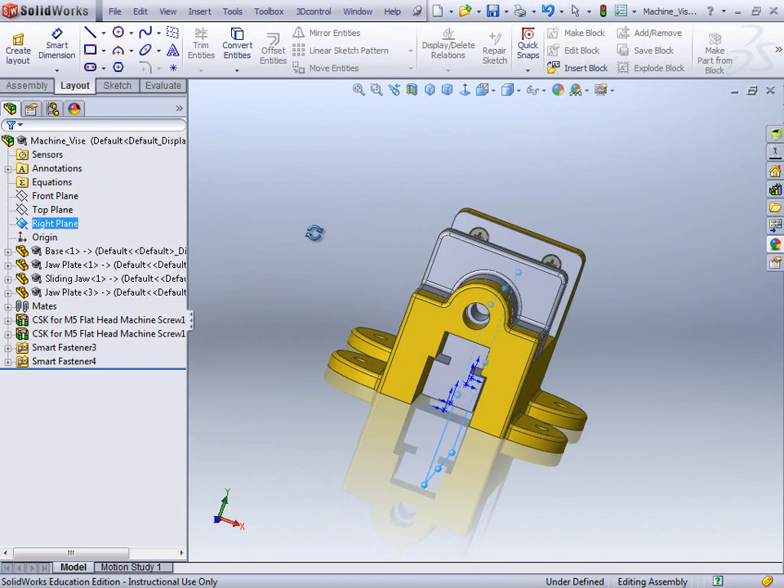Okay, so with this final part, we're going to create a new part on a work plane. So if I just quickly look at the work planes, the right plane there you can see is running right down the middle. So we're going to create a shaft that runs just up in there, and we're going to use the right plane as the plane on which to create it.

So if I can pop there and spin this around and go normal to on that, and if I select my right plane, and I'll go back to my assembly and create a new part using the right plane. Again, select my default template, and we're going to call this one Vise Screw. So Vise Screw, we're going to call this one, and I just save it into the same folder again.

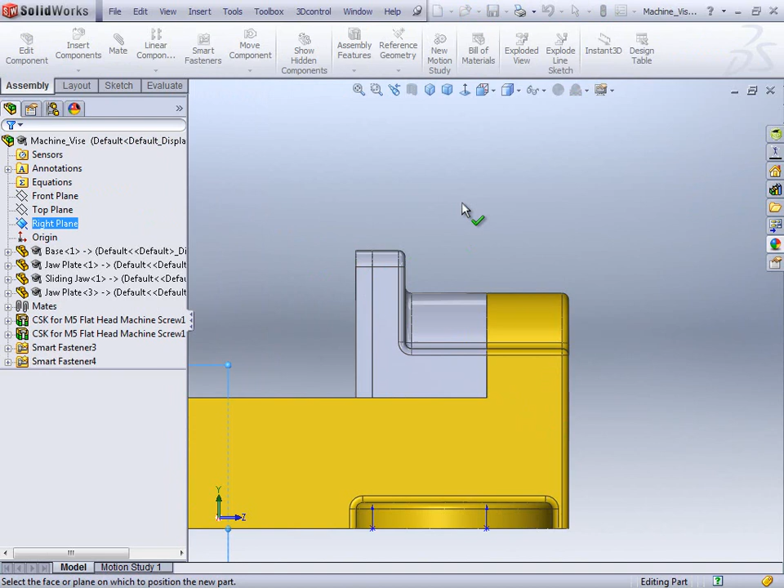So I pop that back into the top down assembly modeling and save that one in there. So we save it in with all the rest of them. So we've got that. Now I can't really see where things are, so if I just put that back to hidden, you'll see the outline there of that. So that little outline, that's the area I want to pop my shaft in. So if I create that on the center line, there's the center line.

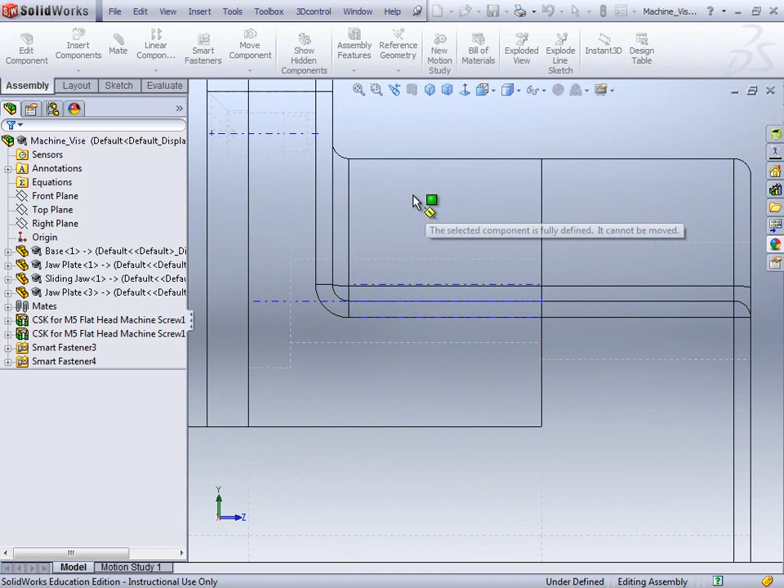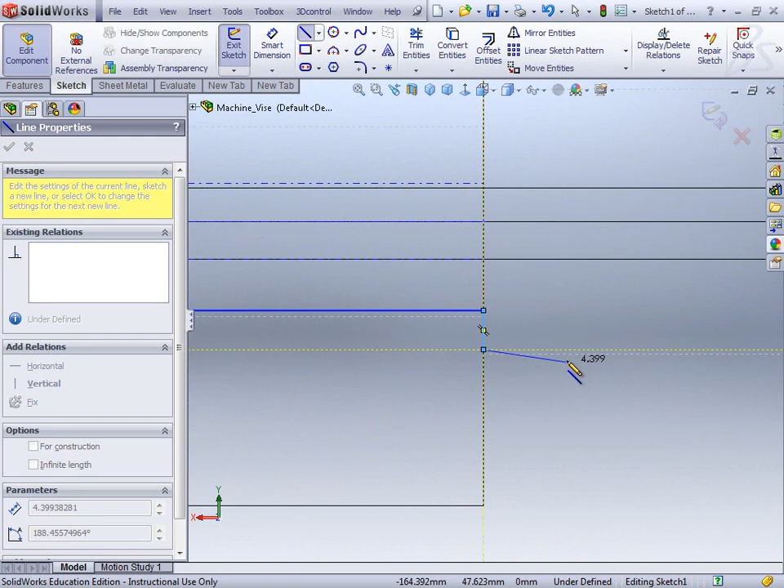So now if I select my right plane as my face for creating my part, I'm good to go now, so I can create my lines. So if I roughly sketch in what it is I'm looking for, somewhere along there, we can pop in the dimensions in a moment. So roughly there, and approximately there, and let's try and get that.

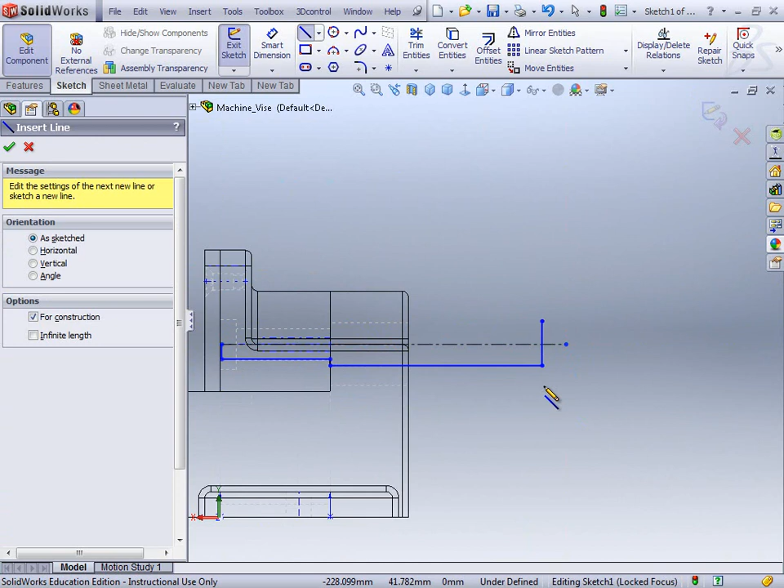Yeah, I'm not going to get it, so I'll just kind of do that, and I'll draw a center line in just to trim that off. That's where I go. So I trim that off. There we go. So that's that one. I'm going to get rid of these little additional center lines now. So that's my component. So we're ready to pop in a few dimensions now. So let's check out the dimensions on that.

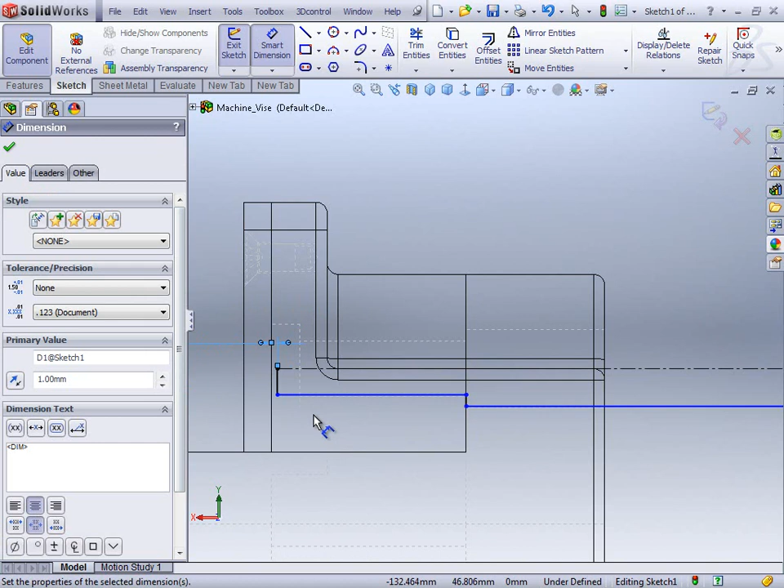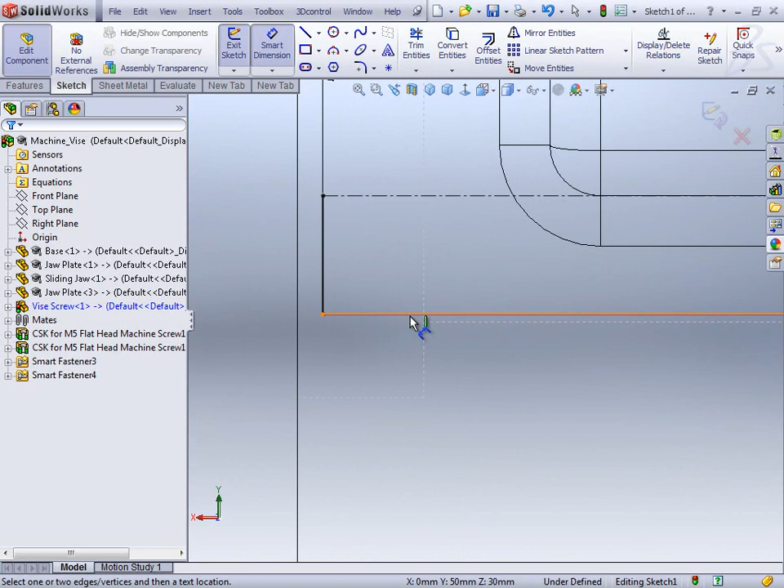This front face here is to be 1 mil, and the gap between here and here, try that again. Okay, so it's not letting me pick that line. So what I can actually do is I can pick on the end point there and that, and produce that little dimension, 0.5. Okay, because that's a curve, it's not letting me pick on that.

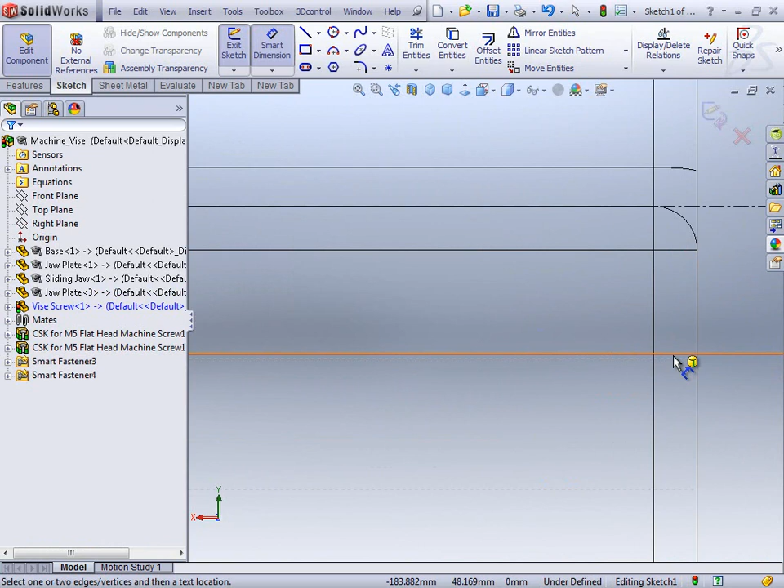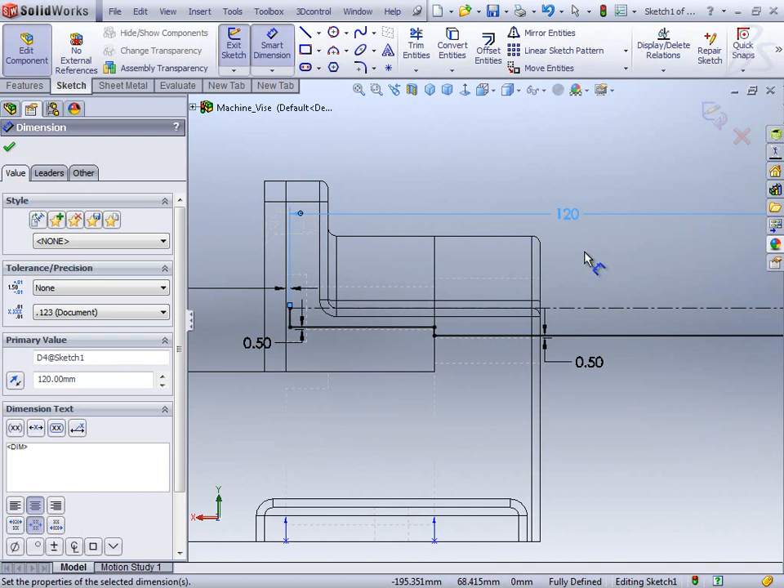And come down here again. Again, if I try the same thing with this one, you see the second can be converted into a line or a circular arc. So again, I'm going to have to pop on the end point of that line and that, and change that to 0.5 as well. And so the overall length of it then is going to be 120, and that's my part created.

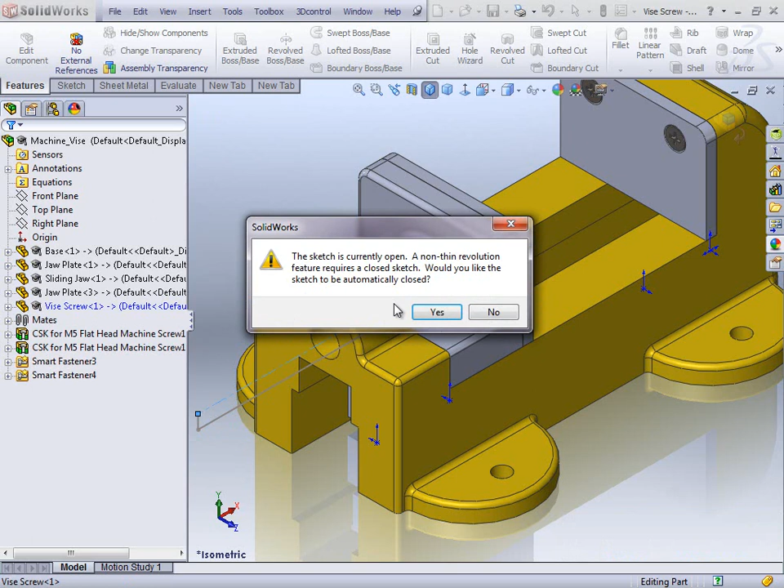So if I look at that as an isometric view and change it back to that, now we can exit the sketch, and I can do a revolve feature. So that's my revolve part, and we're going to let it close automatically at 360 degrees, and it found the axis of revolution. So we're good to go, and that's that shaft completed and in position.

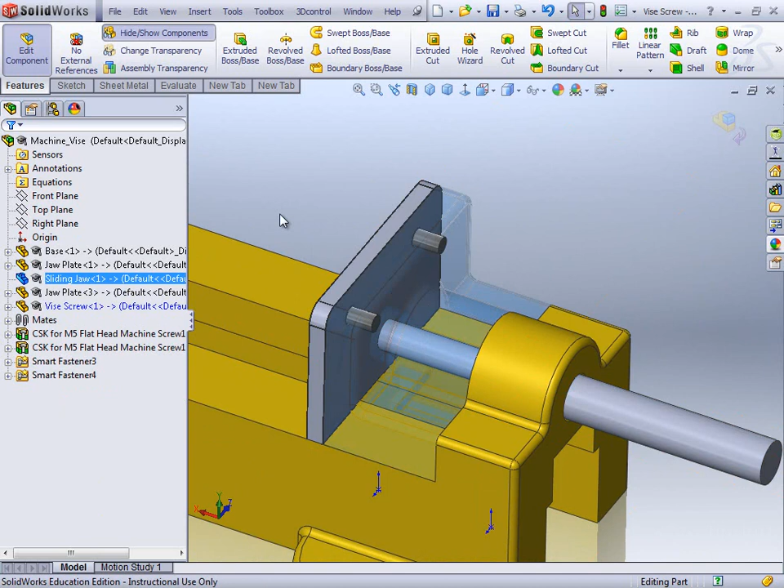And I just hide that temporarily just to show you that I got that shaft in there, and put it back on again. Okay, so that's that shaft in position.